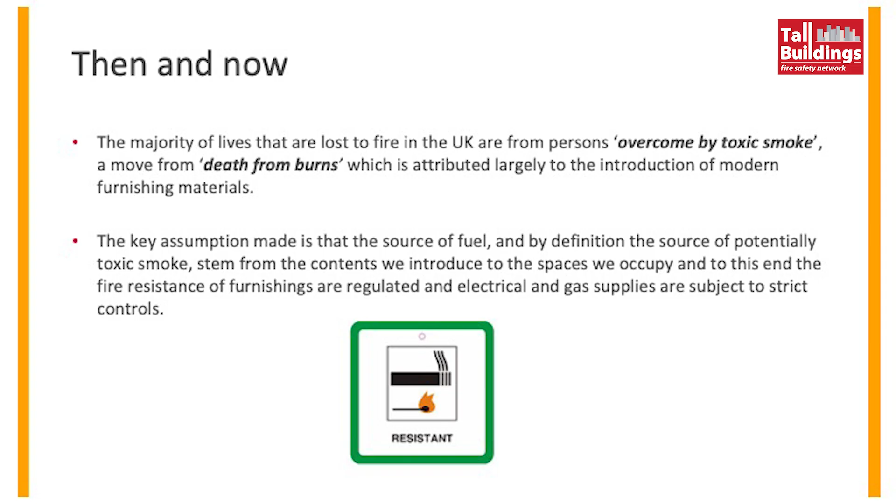So really, obviously, there's a little bit of a then and now to this. When it comes to toxicity and life lost to fire, once upon a time, the majority of life lost to fire was from death from burns. But with the introduction of things like furniture regulations and the like, the majority of lives are now lost to being overcome by toxic smoke.

And the key assumption here is really that the source of fuel, and by definition, the source of potentially toxic smoke, really stem from the contents of a room in the spaces that we actually occupy. And so to this end, this is where legislation has focused, and we have our furnishing regulations and electrical and gas supply regulations, strict controls on those. But I think it's important to look at what this actually implies in full.

When you actually see what this implies, you end up with a sort of bullet point list, which is fairly straightforward. Fires only really start and travel within the building. Only the contents of the living space provide the fuel and are relevant to human health. The empty living space itself is non-combustible and therefore no toxic threat. The construction materials do not participate in fire to cause harm to occupants before evacuation.

That the compartmentation integrity of external walls, which aren't really defined as compartment walls in fire terms, a fire boundary, is irrelevant to any likely fire scenario. The windows and penetrations through exterior walls do not compromise the fire safety or reduce time available to escape. So this is the sort of wisdom of the years, and nothing has changed.

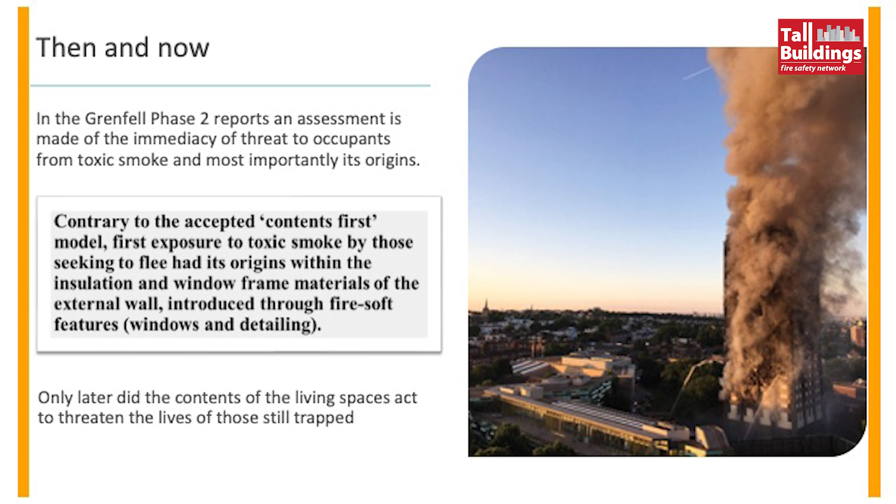And it was only later that the contents of the rooms and the living spaces acted to threaten the lives of those still trapped. Now this turns everything on its head, because when you actually review our bullet list, what does that actually mean? Well, when we look at the first assumption here, fires only start and travel within the building, things which are relevant to life safety. Well, clearly that's not the case when you have mass fire spread over buildings.

We also need to think about other modern building methods, like modular, which can introduce very complex voids around every surface, and which even connect through to the rain screen facade. So there are now multiple paths for fire spread, and with that, the transport of toxic byproducts.

Only the contents of the living space provide fuel and are relevant to human health. Well, clearly that's not true. The empty living space itself is non-combustible. That may be true. But certainly construction materials do not participate in fire to cause death or harm to occupants before evacuation. Clearly that was not the case in Grenfell.

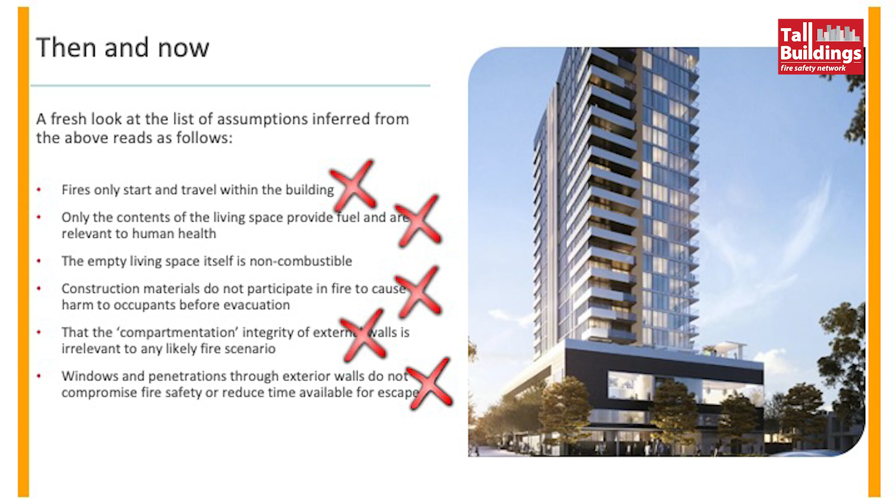And the compartment integrity of external walls really proved to be a very key facet in this, that there was a connect between occupants and the building materials on the external of that building, which were very relevant indeed. And with that, obviously, a key to that were the access provided through the windows and penetrations through the exterior walls, which did compromise fire safety and reduce time for escape.

So with that in view, if we've established that there may be circumstances where toxicity is an important factor for life safety and escape, particularly where you're remote from help and escape might be difficult, then we need to look at it in more detail. But toxicity itself is quite a complex thing. We need to know very much what the source materials are.

As I'll show you today, we need to know how and where they are burning, what the toxic components are, what the routes are for contact with people, and what factors, resulting from the toxicity, will impact the ability to escape, the time to incapacitation of people, and time for lethality. And it is quite complicated.

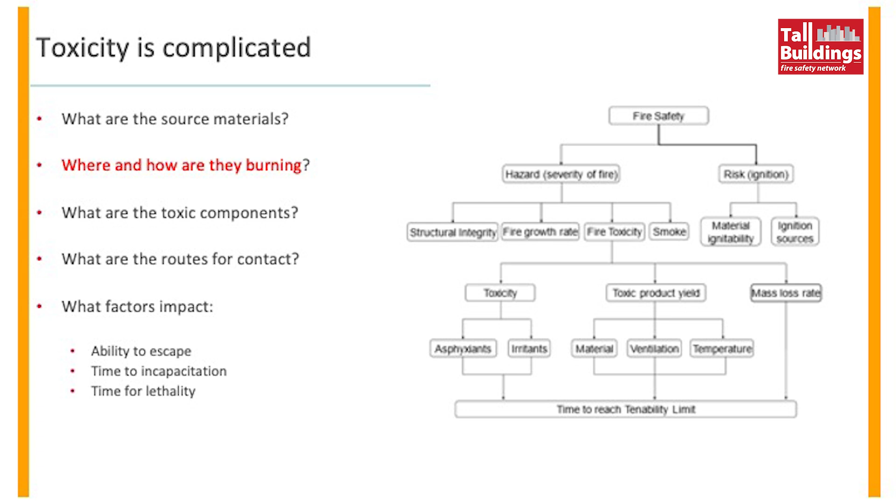Now, what do we mean by toxic threat? If we just look very simply, it comes down to a number of things. Most simply, production of smoke causes loss of visibility, which may hinder escape. But then we also have irritant products in there, which may irritate the eyes, the lungs. This may hinder escape. Things like hydrochloric acid, formaldehyde, acrolein. These are all products which can be generated under the action of fire from many products.

We also have the poisons, and these lead to asphyxiation. The core one being carbon monoxide, and this, as I'm sure you all know from smoking commercials, will really take the place preferentially of oxygen in hemoglobin of the blood, thereby depriving the body. And we have materials like hydrogen cyanide as well, which prevents the use of oxygen by the body's cells.

We also have gases which stimulate respiration, like carbon dioxide. So when you're in this rather bad atmosphere, it's making you breathe a lot faster, so the rate of deterioration of someone might be faster. And also we might be in quite a reduced oxygen atmosphere because it's also consumed by the fire.

And then, probably less relevant to this talk, we have the longer-term toxicity, toxic materials for humans: the particulates, carcinogens, and endocrine disruptors. These are the sorts of things which no doubt you've heard Anna Stec talk on at some time, but if you want to know more about that, please do refer to her papers on it.

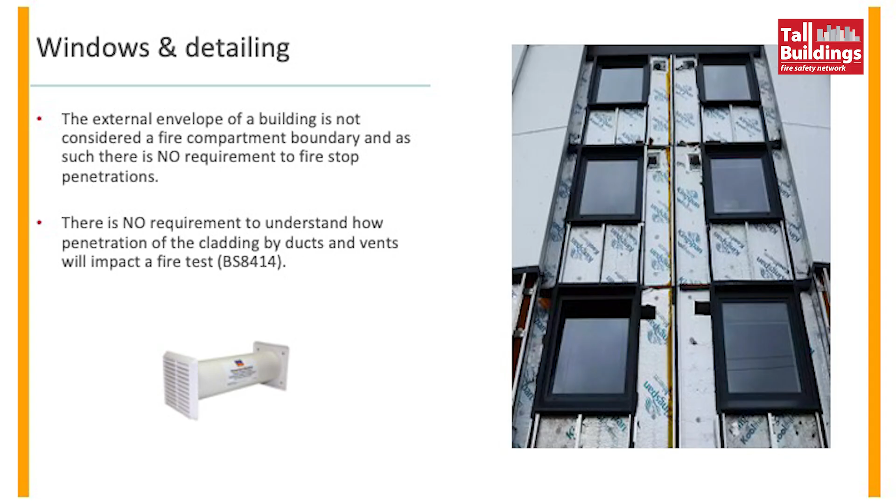So if you think of something like a kitchen duct, between maybe this room and a corridor, an escape route, that will have very defined detailing to ensure that you preserve the fire integrity of that wall. But if that same duct is put in this wall to the outside, the same rules don't apply. It's not considered part of the fire compartment. That's not to say that sometimes they're not.

So there's no requirement, and also in the testing of facades, the infamous BS 8414 testing, there's no requirement to understand how penetration of the cladding by ducts will impact the fire test in terms of fire spread or anything else for that matter, such as the transfer of toxicity. And this is what we undertook to look at.

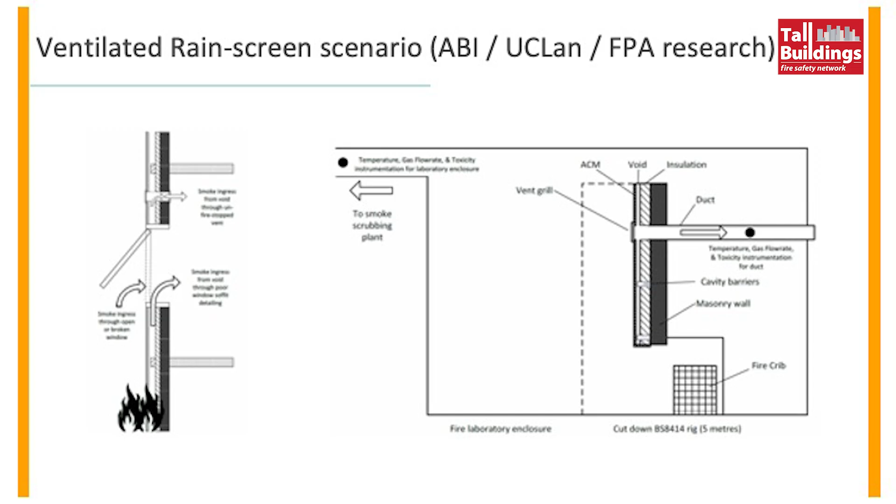You can see in this picture here on the right-hand side the sort of ducts that come through this cladding here. Really, it's surprising the way these are sometimes implemented. Sometimes they actually just open out into the cavity, and there may be just a few slots cut in the rain screen itself. I've seen instances where there's not even that, where actually you are venting into this cavity, which is a very strange thing to do. And when you think about ingress and egress of fire potential, it's a very stupid thing to do also. But these are all the sorts of things that have lacked thought and guidance.

But these sorts of features play no part in 8414 testing. But we thought we'd look at it. But when you actually break down what you're looking at that might be relevant to toxicity, we made the decision to test for toxicity in two places.

Obviously, we had our rig in a sort of fire laboratory test room. Now, we can just look at the general smoke layer that accumulates at the top of the building. That's one thing. That's fine, and we certainly did that. But there you're measuring basically the products of combustion which have burned in a good and highly ventilated oxygen environment, just like having a bonfire of parts. But actually, we know that the route for communication is through these voids here. And so you'll see a few arrows there coming up on the left-hand side diagram up through the vent.

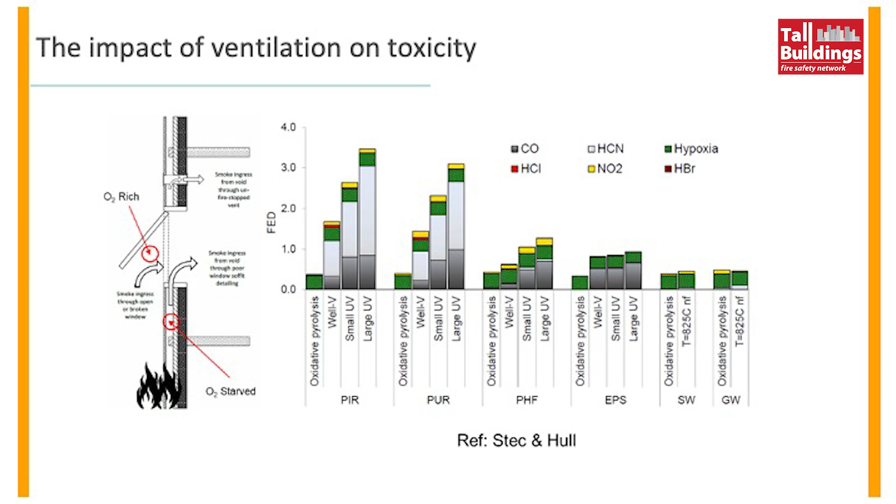Now, what led us to look at this? Well, here's some historic work from Professor Richard Hull and Anna Stec from UCLan, who are very knowledgeable on all things toxicity. And they undertook a study of different insulating materials which were combusted at different levels of oxygen ventilation. So these figures along the bottom refer to well, small and large under ventilation. And what you see if you look at the first row for PIR materials, as you reduce the amount of available oxygen or increase the amount of under ventilation, you'll see that the toxic threat of the products that are evolved in that situation go up quite significantly.

Now, the left-hand margin there is FED, which stands for fractional effective dose, and that is a measure of time to incapacitation or death of 50% of a healthy human population, and a number over 1 is where incapacitation or death may occur. I don't know the details of this specific diagram. I'd need to look back. But these are the sorts of analysis that we use in this study. So what you need to take away from this slide is when you start to burn things in underventilated conditions, the level of toxicity rises pretty enormously.

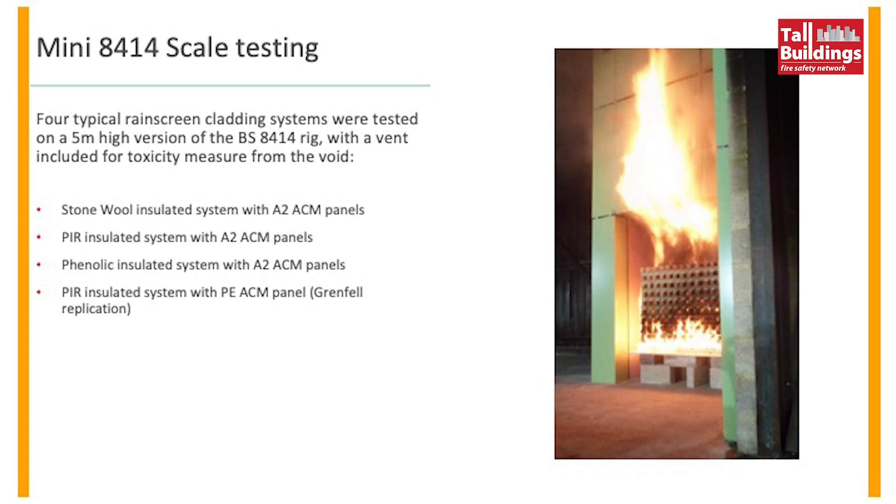Now, at the Fire Protection Association at the time, we had the benefit of lovely big labs. There was another purpose to doing these tests in that we replicated some of the government tests that were done because we had some concerns about the way that the panels were fixed in place. They seemed to be a little bit over-engineered from what might be considered normal from the facade engineers that we spoke to. So these tests served a number of purposes, but we did 4 tests on a mini cut-down rig: stone wool insulation with an A2 ACM panel, a PIR insulated system with the same panel, and a phenolic insulated system with an A2 ACM panel. And then the final test, we really tried to replicate the materials that were on Grenfell at the time to see how we would get on.

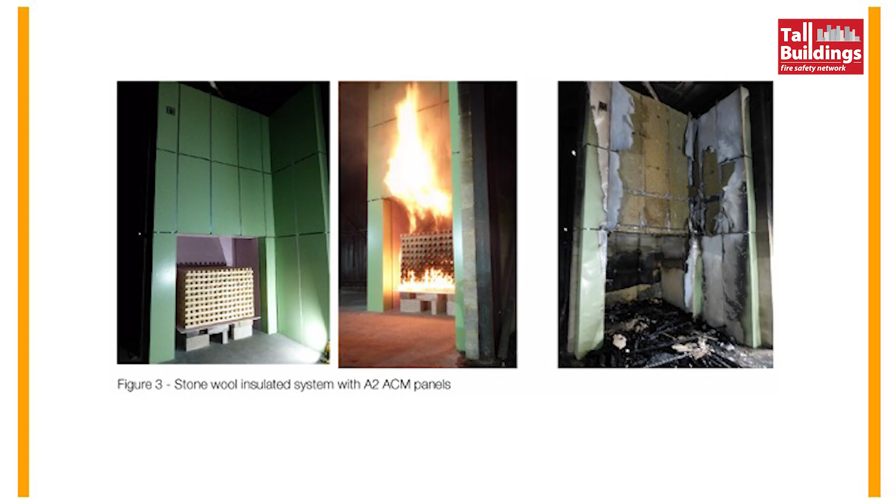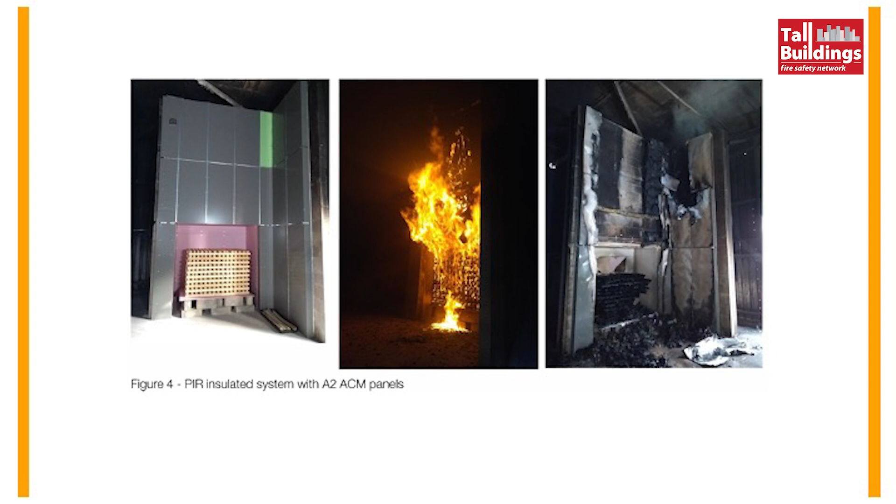And here are a few. On that left-hand picture, on the top left-hand corner there, you'll see a vent that's been fitted. It has all the correct cavity barriers in there, so they've been correctly built. So this was the stone wool insulation, and you can see the level of destruction done at the end and how the fire progresses. The PIR insulation, similarly, obviously it burns away and panels fall away. With the fixing method that they have, it is only aluminium, obviously. And then we had the phenolic. Okay, so these tests all look rather similar.

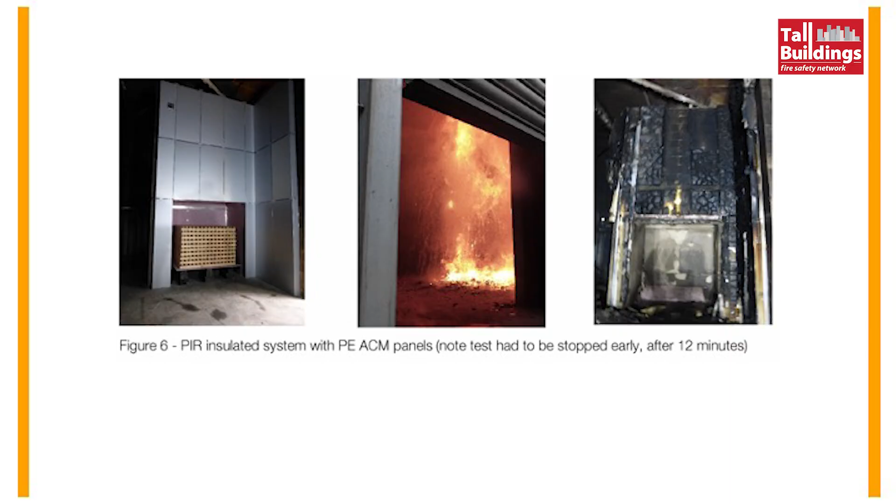Then we came to the Grenfell recreation that we did. I'm afraid we could only run this test for 12 minutes. Beyond any doubt, those materials are absolutely dreadful, and they are different to all the 3 I've showed you before, with the PE panel, so this is a non-fire resisting ACM panel. It was a disastrous test, and we had to stop it very, very prematurely indeed. I think you'll see from that middle picture how much burning material is falling in liquid form onto the floor there. And of course, this is at the root of the Grenfell problem. These are materials which are traditionally used just for road signs, motorway road signs and things like that, not originally meant for putting on buildings, but that's where they ended up.

So the type of results that we got from this, if we just look at the 2 crucial things that we used to measure fractional effective dose, carbon monoxide and hydrogen cyanide: the concentration in the kitchen duct simulation that we had in there was up to 100 times that measured from open burning. So here we start to see why there can be such a high toxic threat to occupants directly exposed from these rain screen designs with inappropriate materials and inappropriate fire stopping or separation from those materials.

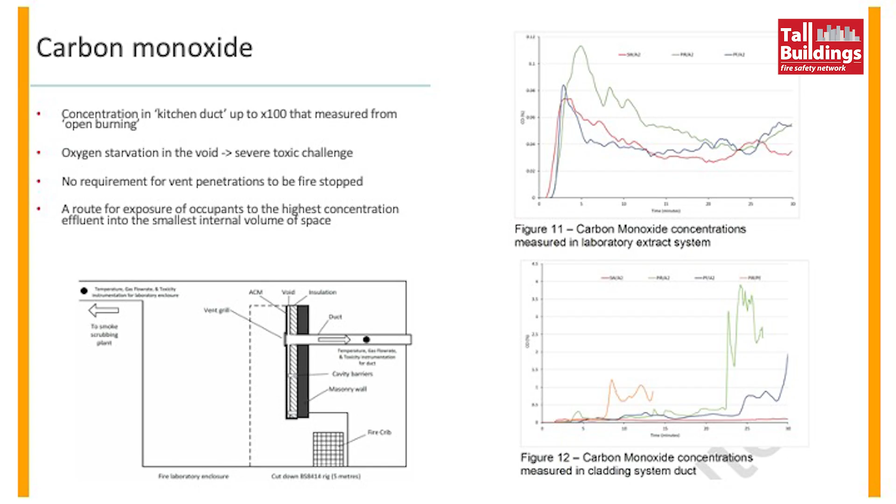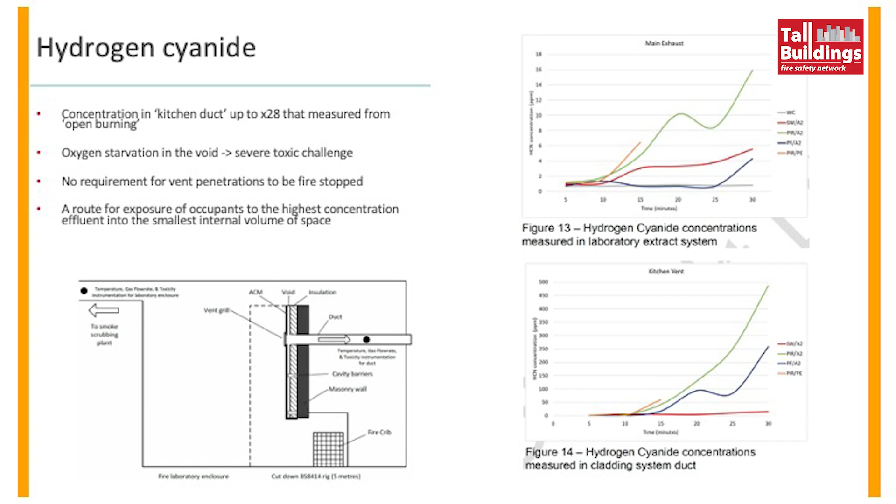So we measured oxygen concentrations in that void as well, and obviously they're very much lower. We also did the same test for hydrogen cyanide, and we got pretty similar results, in that in the kitchen duct itself we had 28 times the hydrogen cyanide measured from open burning, and we again saw a similar pattern of how the various combinations of materials actually performed. Obviously the combustible insulations gave a response, and very little from the non-combustible insulation that we had in there at the time.

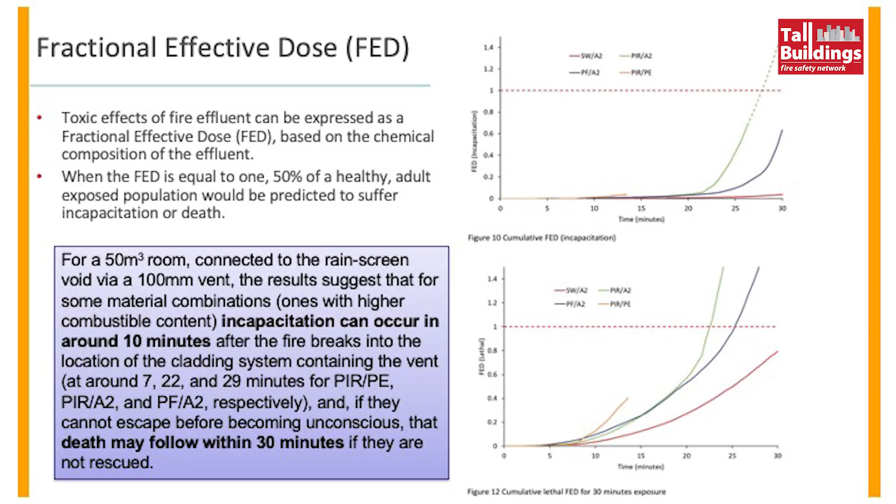I think this was quite a startling finding, and I think you'll understand from Ed Galea tomorrow, he may be showing you results a little more worrisome than this. But it starts to explain some of the terrible things you hear about the Grenfell situation, people expiring while on the phone and their flat was not on fire.

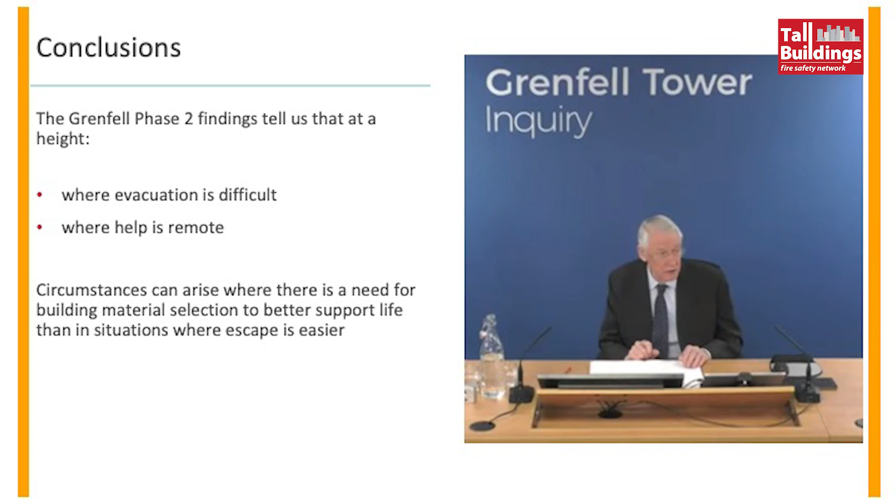So really, just to conclude and to wrap up, the Grenfell Phase 2 findings tell us that at a height where evacuation is difficult and where help is remote, circumstances can arise where there is a need for the building materials selection to better support life than in situations where escape is easier. Now, this is common practice in many other situations to do with transport. As I mentioned, I do a lot of work for the military on ships and submarines, and certainly the inventory of materials and the evaluation of the toxic threat that they present is an absolutely integral part of their selection as being fit for purpose. People are very well aware of this: London Underground, shipping, submarines, aircraft, all tightly controlled.

Now, when you think about it, what's the difference between someone who is up high in a building that's on fire versus someone that's deep down in a submarine that has a fire? There's very little difference, actually, at the end of the day. They're remote from help. Escape and evacuation might be impossible or difficult. So really, it's a consideration that maybe there is a scenario where building material selection should include a consideration of toxicity going forward.

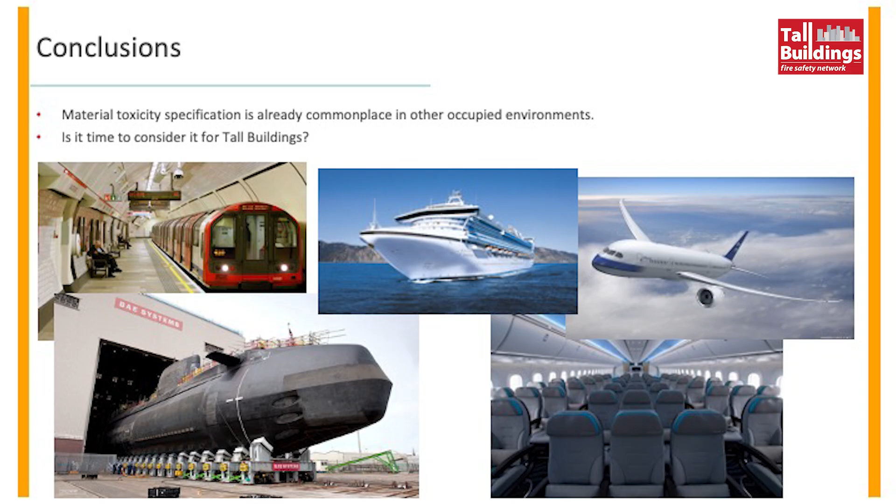And then what we need to respond to that is, do we have the appropriate test to do that? This is what the likes of Richard Hull have been working very hard on, so that we can actually test materials in the oxygen level environment that they are likely to experience, to get a proper true reading of how they are going to perform in the end scenario.